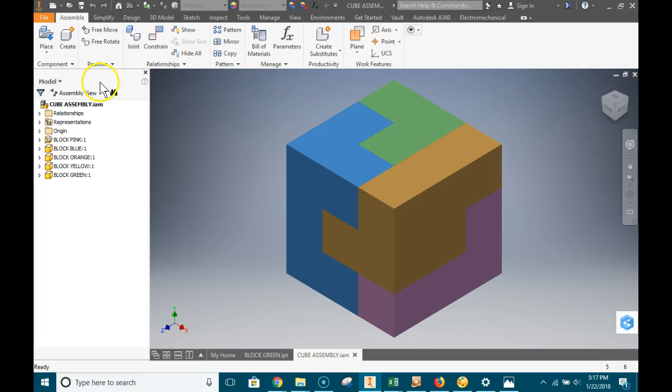So if you go to Inventor, remember we made the puzzle cube assembly. This is where we put all 5 pieces together. They're all constrained together. What we're going to do is, once we have that, we can go to File.

And New, and we're going to go down here where it says Presentation. You should only have one selection, the standard IPN. Double click this. Okay, and then if you're working in the right folder, you'll see your puzzle cube assembly that

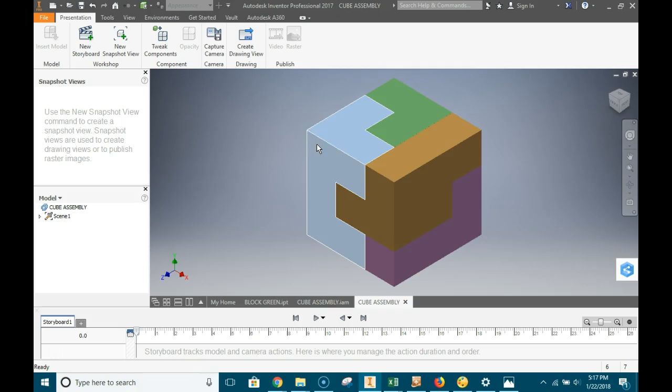you've previously put together, so you open that. Okay, so here is our puzzle cube. I'm going to zoom out just a little bit using Control and Scroll wheel. And now what we want to do is we want to pull this cube apart.

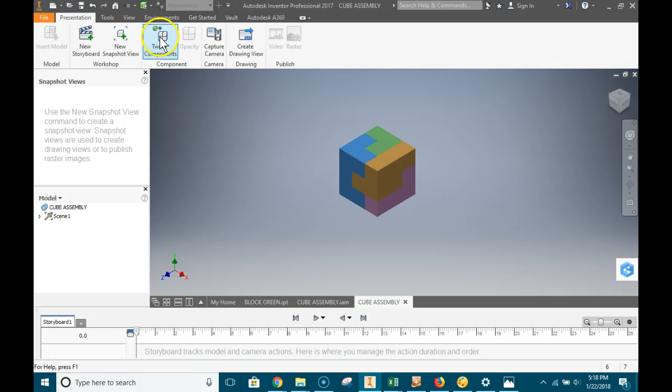So we'll leave the green piece in place and we'll pull everything away from it. I'm going to use the function tweak. So you click on tweak and you click on a part that you want to pull away. You have 3 axes. As I drag this, you can see that I can move it left and right, up and down, back and forth. So I'm going to pull it out and push it back a little bit.

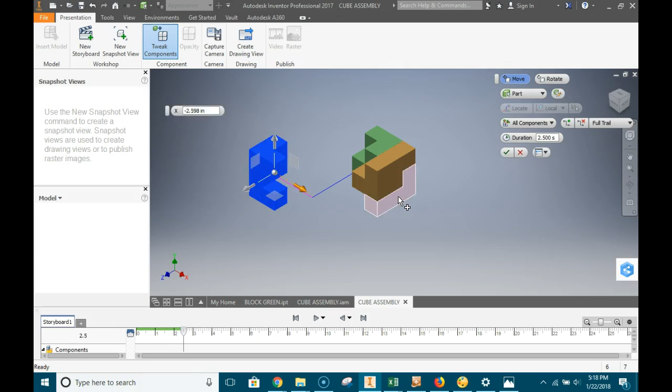That's the blue part. And then the pink part, I want to grab it and pull it straight out this way. And then the orange part, why don't we go this way? We're going to pull it a little bit this way and a little bit this way.

And is that what we need? Okay, so that's pretty good there. I thought there was another part in here. There should be one more.

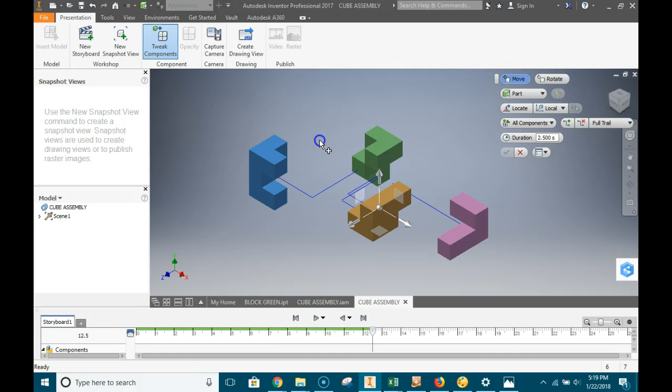And so let me spin this around. There's a yellow part in here. Okay, so somehow I grabbed both at once. So just like all good things, I'll Control Z a couple of times and make sure we only get the orange part this time. So here's the orange part.

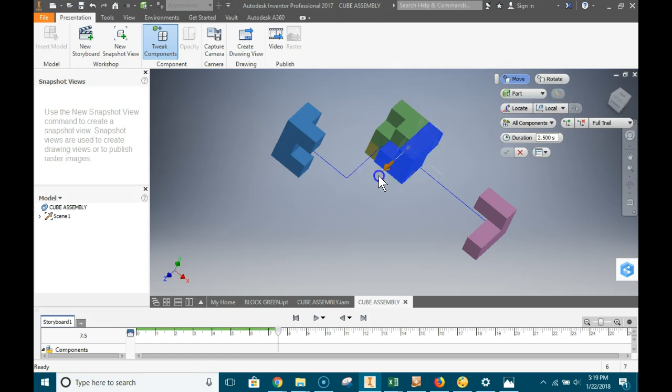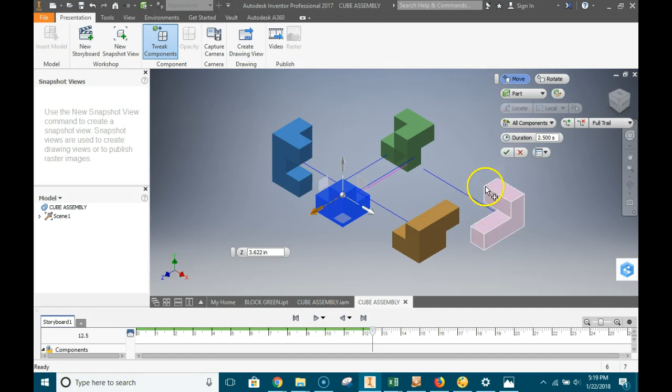We're going to tweak and we're going to pull it forward and to the right. Going to go back to my home view, and let's pull this more to the right, and then we'll pull the yellow piece out straightforward. So I can show how all of these pieces are joining in with the green piece to assemble.

You'll probably want to mess with this a little bit. You want to have it where they're separated so you can see each one, but they don't overlap. So I'm going to squeeze things in a little bit. That's probably okay. So when you're done moving stuff around, you click on the check mark, and now you have an exploded view that shows how those 5 pieces go together to make the cube.

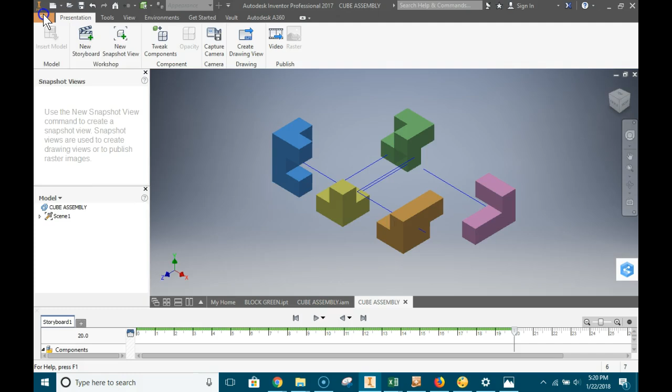Save your work. So File and Save, and then let's call it Puzzle Cube Assembly Exploded, or Cube Exploded. Be sure you're using uppercase letters. And save it. Ta-da!